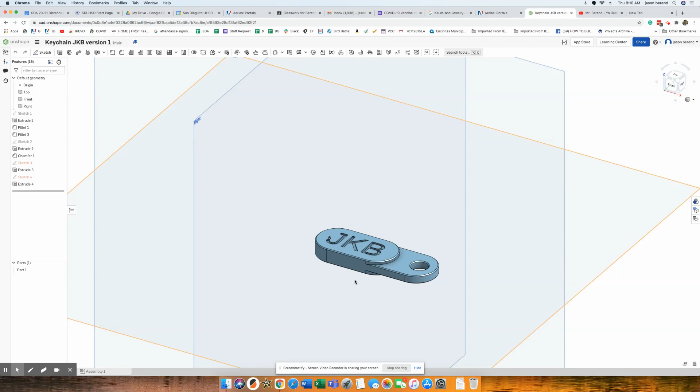All right, today we're going to be going over how to get something on Onshape, like this keychain, onto our shared 3D printer build plate so that it can be printed, say if you're working online at home. Make sure if you're doing this keychain, it's got your initials or first name on it and meets all the requirements.

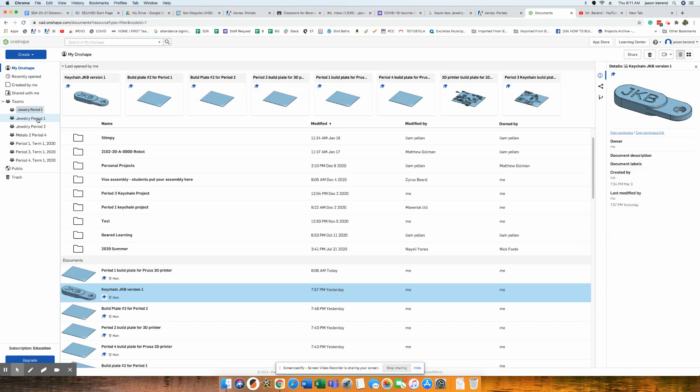So to do it, basically we're going to go back to your main Onshape screen. On the left side of the screen, it'll say Teams, and you should be part of a team, so it's important you click the right period. I'm going to click period 1 for example, but you might click a different period. Find your class here, then look towards the top. The top will be the newest thing. It says period 1 build plate for Prusa 3D printer, and so I click this.

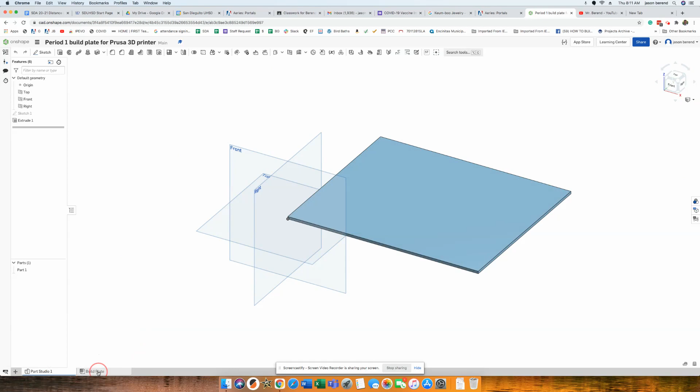And down here too, take note that there's the Part Studio 1 tab, and there's another tab that has a different icon. It has an assembly icon, looks like a square with this dark square in the middle or on the side kind of. So make sure that you're in the assembly tab with this icon right here. In this case, it's called build plate.

So once you're sure that you're in that, you need to get your project. I'm going to go up here to insert. And I don't see my project, it's not there. So what you have to do is click on Other Documents, which is right here. And then the next step is to click on My Onshape.

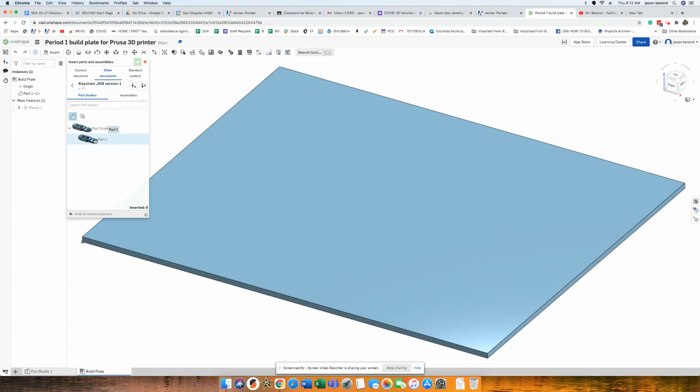And here you should find anything you've designed fairly easily. So once you find your design, like here, you'll just click the part. Left click, and now I can move it, move it wherever I want. Once it's on, you're done getting it, so hit the green checkbox.

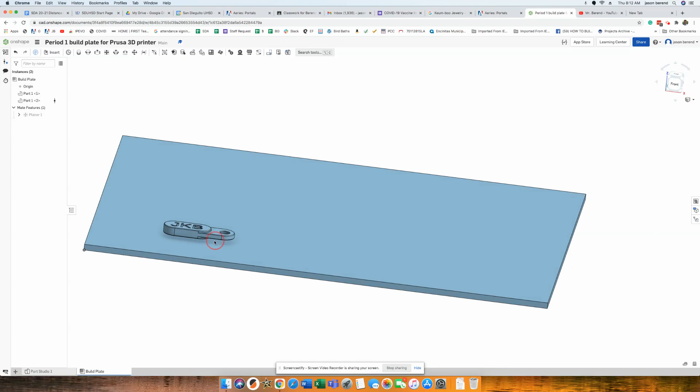And you're not done yet, because right now my keychain is floating above the build plate, and that's not okay, so we have to fix that. We're going to fix that with a mate. Think of mates as like if you were to glue two things together maybe. Up here there's different mates, and to mate we're going to try the planar mate first.

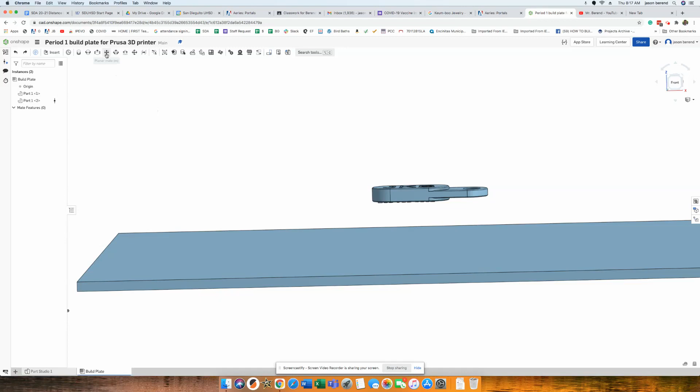So we're going to mate the top of the build plate, left click, and when you click here, notice it comes in right here. If you made a mistake, you can hit the X. So I want to mate the top of the build plate.

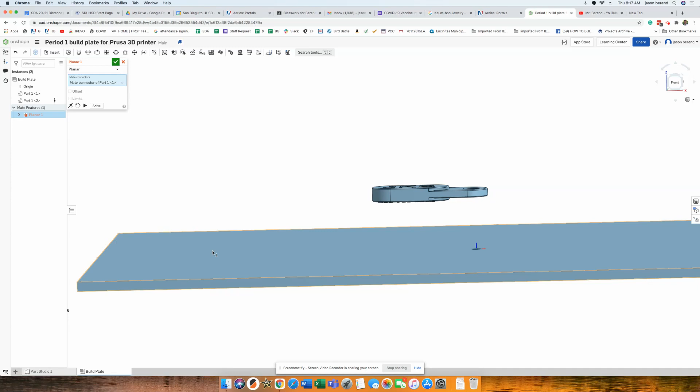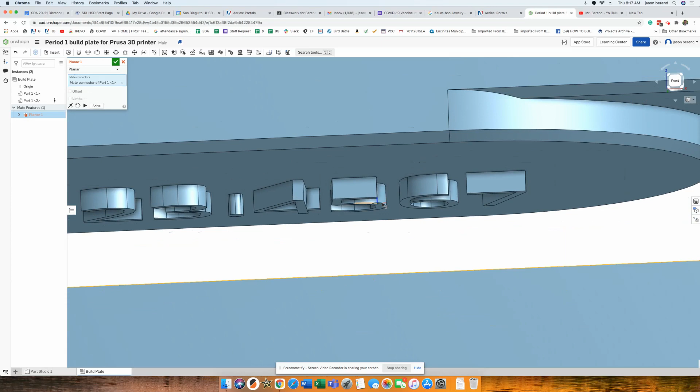And then now to the very bottom of your 3D printed keychain, in this case. But whatever the bottom of your work is, whatever thing you want to attach to the bottom. So let's say you didn't have these numbers here, you just had like a flat bottom, which most of you probably have. You would just click this face right here.

Okay, so now I got two things on here, and we'll do the green checkbox. Let's go to our front view here, and so now when I move it around, before I could move it up and down, but now I cannot move it up and down. So it worked. You can slide it off the edge, but you can't move it up and down anymore. That's how a mate works.

Now you can see under mate features, it says there's a mate here, and you can delete it if you made a mistake and just try it again. Also, I meant to do this for the class, but I'm also going to mate this point here to the origin so that our build plate doesn't move around. This only has to be done one time. That's our origin right there.

And then the last thing I want to tell you is that you should move your work really close to the edge, like as close to the edge as you can get it. So you can even go to the top view, and then as students, you're going to want to move your work together really, really close. Move it right to the edge like that and get them as close as possible so we can fit many on here.